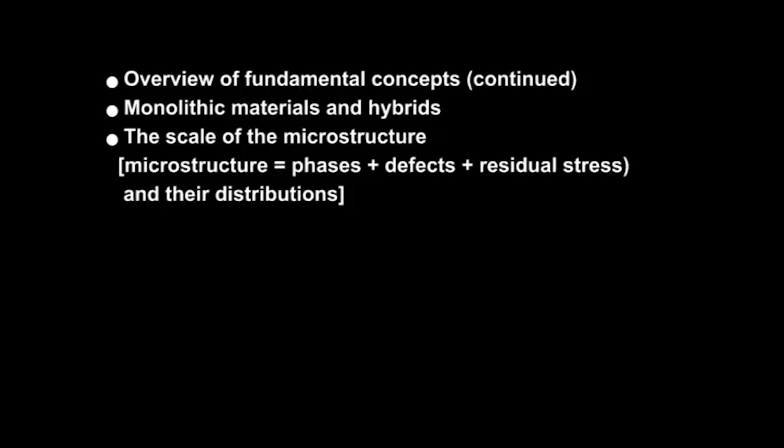Before proceeding further, let us briefly review the concepts we have considered so far. We asked the question of what determines the properties of materials, and the answer we gave was it is a combination of the composition of the material, the phases present in the material, and their distribution.

We have to consider the defect structure, a formal definition of which we will consider soon, and last but not least, we have to consider the presence of residual stress in a material, which is present even in the absence of any external loading or constraints. This becomes especially important when we are talking about structure sensitive properties like yield stress and fracture toughness.

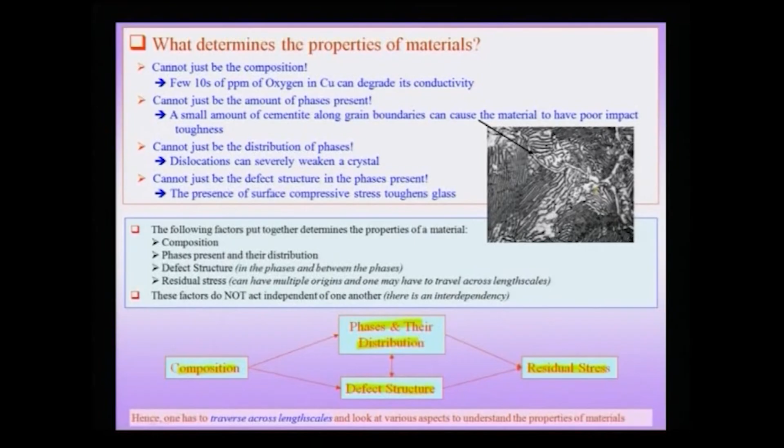As an example, we had considered the micrograph shown on the right hand side, wherein there is a steel with a cementite network all along the prior austenite grain boundaries.

We had also asked the question that if you are talking about phases and their distribution, what kind of phases exist, and we had classified phases based on the geometrical entity or the physical property.

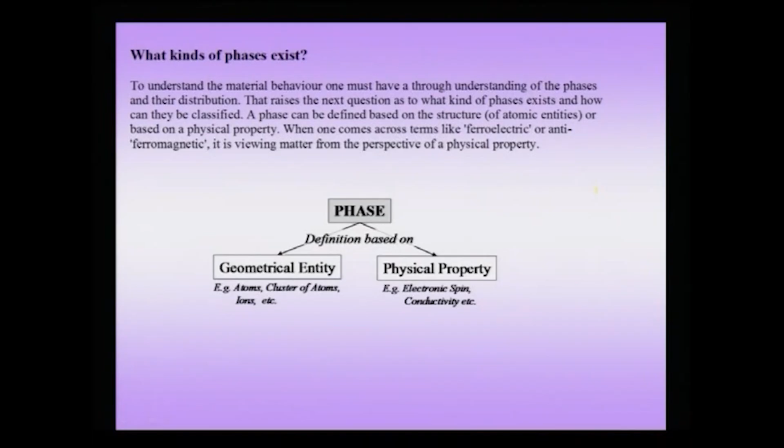We had also considered various ways of looking at the atomic form of matter, and we had come across important concepts like the atom based structure, which can be classified into crystals, quasi crystals, and amorphous phases. We also said that based on band structure we can have metals, semiconductors, and insulators.

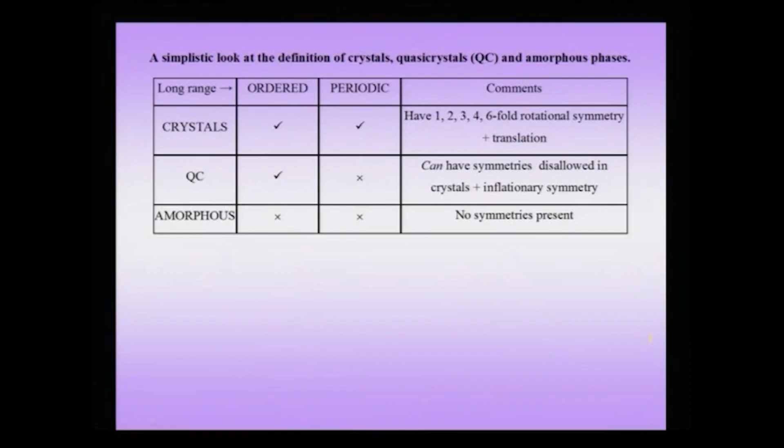From this course's perspective, we had talked about a size based classification which gives us nanocrystals, nano quasi crystals, nano liquid crystals, etc. We had also defined crystals in a very simplistic way: crystals are ordered and periodic, and amorphous phases, on the other extreme, are neither ordered nor periodic. Today let us consider classification of crystals based on the bonding characteristics.

Based on bonding, a substance could belong to a certain type like an ionic crystal, but based on the atomic order the same thing could be glassy, in other words amorphous. Like before, one way of classification will not clash with another way of classification. The bonding characteristics of the material play a very important role in all the properties we think of.

So, based on bonding, we can classify crystals into two types: molecular crystals and non-molecular crystals. In molecular crystals there are covalently bonded molecules, like for example in fullerene we have the C60 molecule, and in water we have the H2O molecule.

Other examples of molecular crystals are crystals based on the carbon dioxide molecule, sucrose molecule, etc. The bonding within the molecule is typically of the covalent type, but the intermolecular bonding which actually gives rise to the crystal is usually of a weak type; it is a non-covalent interaction.

Typically these could be of hydrogen bonding type or dipole-dipole bonding, a detailed list of which we will soon consider.

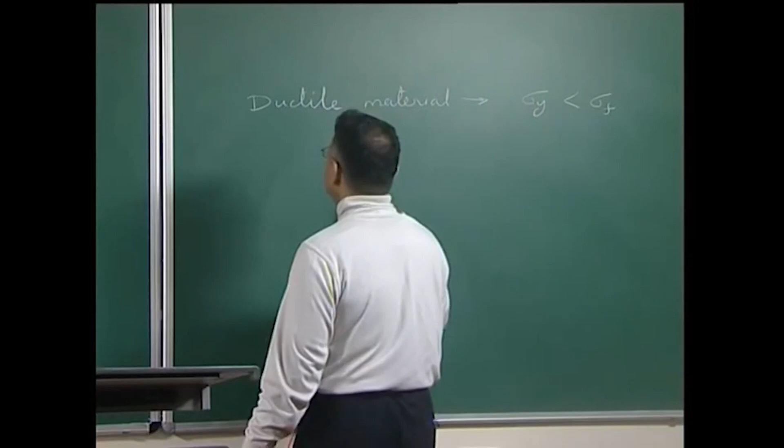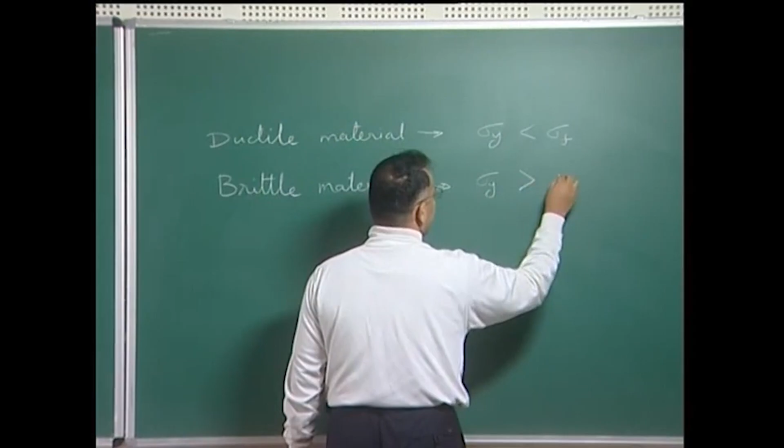So, if I am considering a ductile material, a brittle material on the other hand is one whose yield stress is larger than the fracture stress. A ductile material will yield first before fracturing. In other words, the yielding here is specially by a mechanism known as slip, and fracture is caused by propagation of cracks.

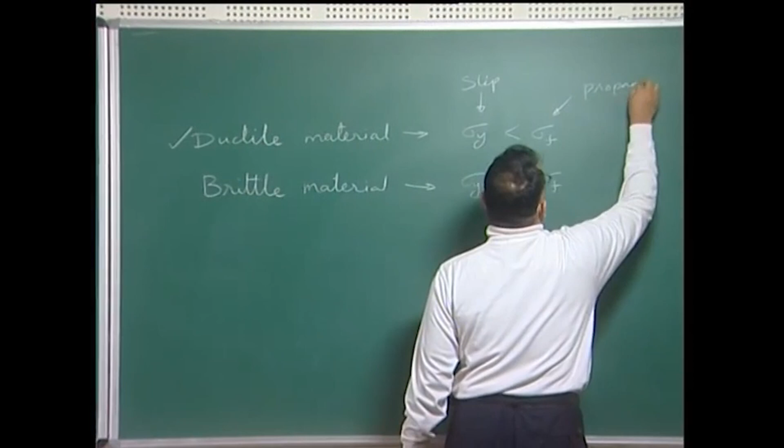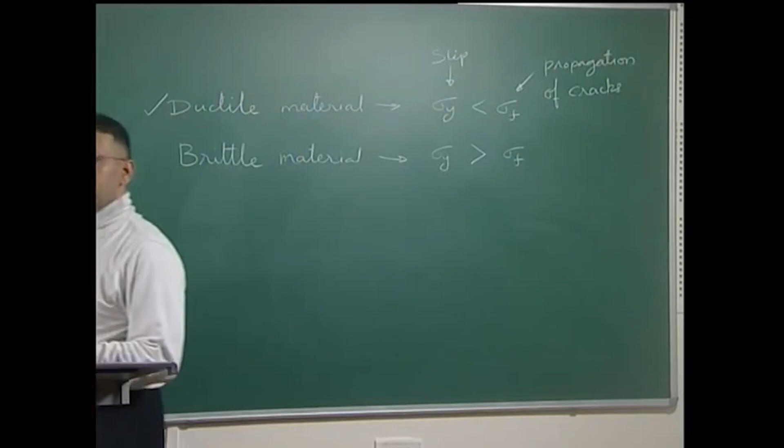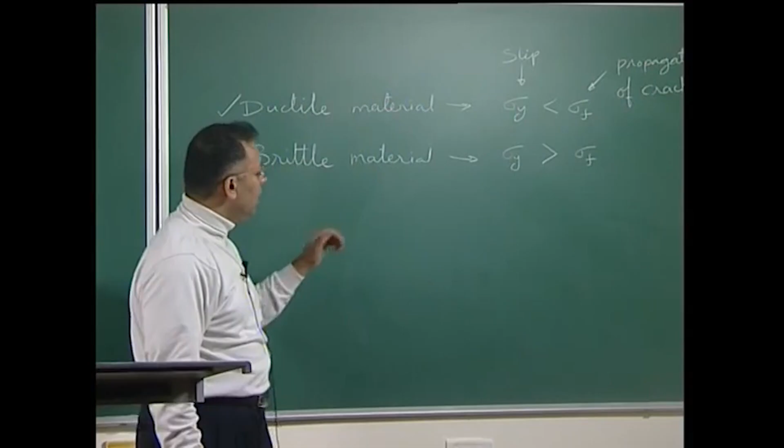So, when I have two competing mechanisms which can take up my external loading, one being slip and the other being propagation of cracks, if my yield stress is smaller than my fracture stress, then the material is called ductile. Yield stress is a macroscopic manifestation of the inherent lattice friction, which is otherwise called the Peierls stress or the Peierls-Nabarro stress.

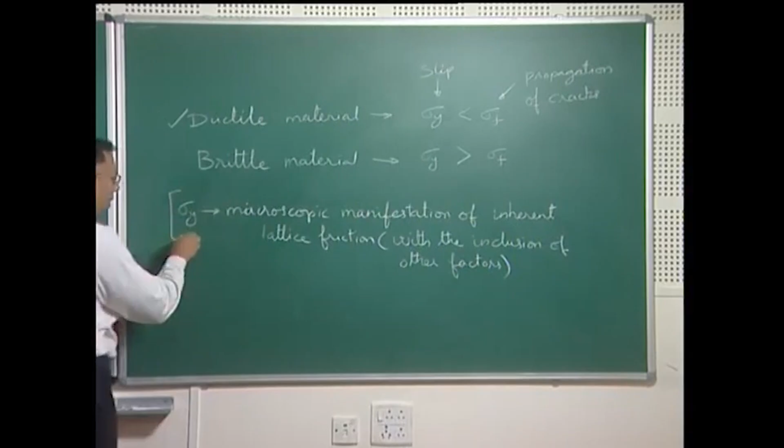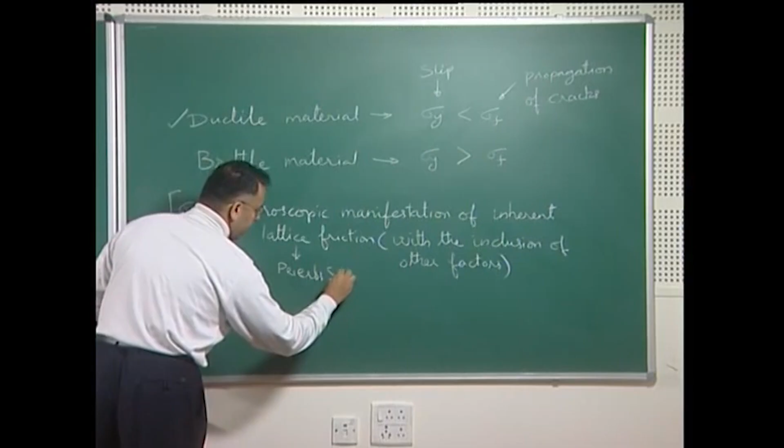Other factors would come into picture when I am taking my inherent lattice friction, which I call the Peierls stress, and go to a macroscopic gross property like yield stress. So, this Peierls stress is a strong function of the bonding characteristics of the material.

A covalent material typically has a high Peierls stress and therefore has a high yield strength, so if I am trying to plastically deform a covalent material like diamond, it turns out to be difficult. An ionic material, which again has a high Peierls stress, would fail by brittle fracture rather than plastically deforming. Therefore, if I am looking at any property, the bonding characteristics become very important in determining the properties.

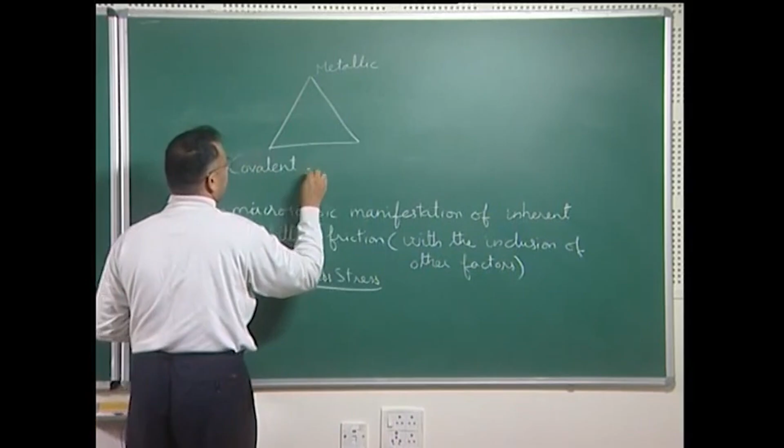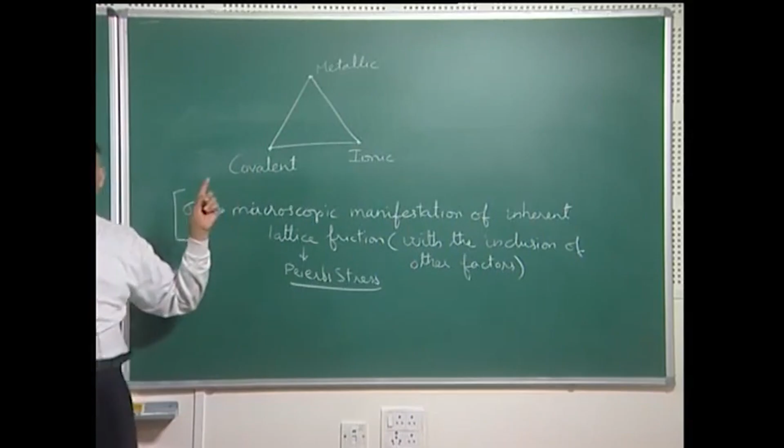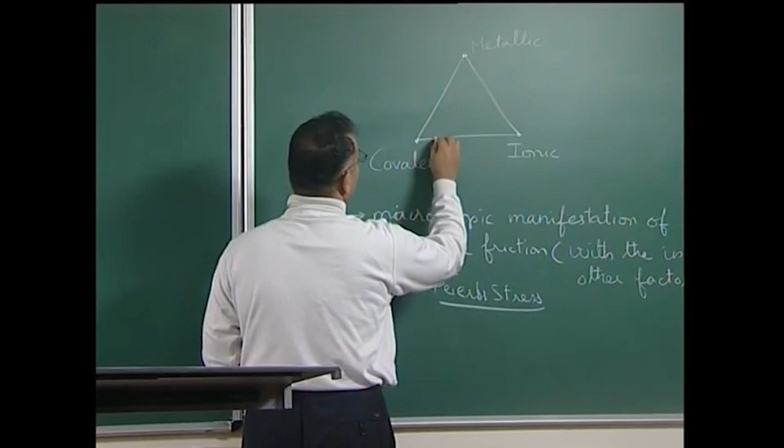These three extremes, metallic, covalent and ionic, represent three extreme bonding characteristics, and a given material could actually fall somewhere between them on this triangle. It could have some covalent characteristics but a little bit of ionic characteristic, and so in this triangle it could lie here. Certain metallic crystals could also have a certain amount of covalent character, and therefore would not be on the extremes but would lie somewhere in this ternary looking plot.

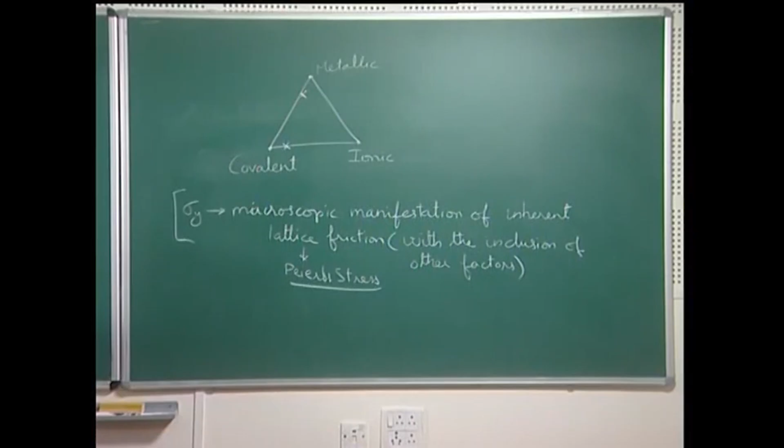Therefore, real crystals have characteristics which have a bonding that is a combination of covalent, ionic and metallic characteristics. We will consider in the next slide that there are other weak interactions which can mediate the formation of crystal in molecular crystal apart from the hydrogen bonding, which is responsible for the formation of the ice crystal.

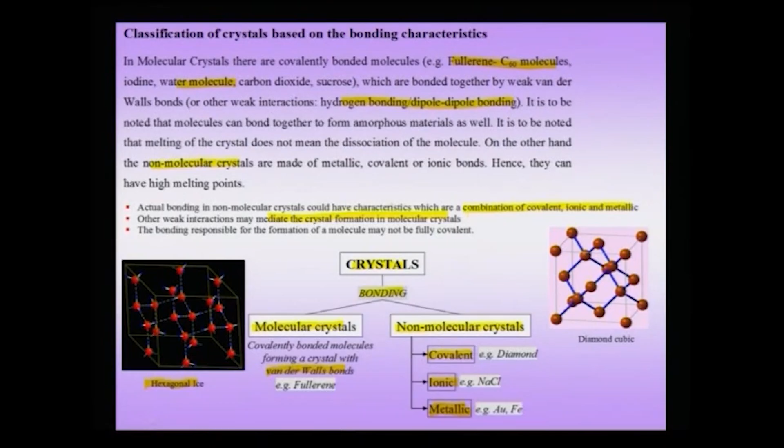The kind of bonding we are considering here forms an important basis for the properties that the crystal exhibits. Therefore, it is important to note if the crystal is a molecular crystal or a non-molecular crystal, and given it is a non-molecular crystal, which will form much of the considerations in this course, we have to consider if it is a covalent crystal, an ionic crystal, or a metallic crystal.

We will briefly consider here various kinds of interactions in molecular crystals, the weak interactions, though we will not go into detail. An interested reader may want to refer to details for various individual molecules or crystals as to which bonding is responsible for the formation of the molecular crystal. Typically, in this molecular crystal, it is covalent interactions which give rise to the molecule, and these are typically given symbols like sigma, pi, delta.

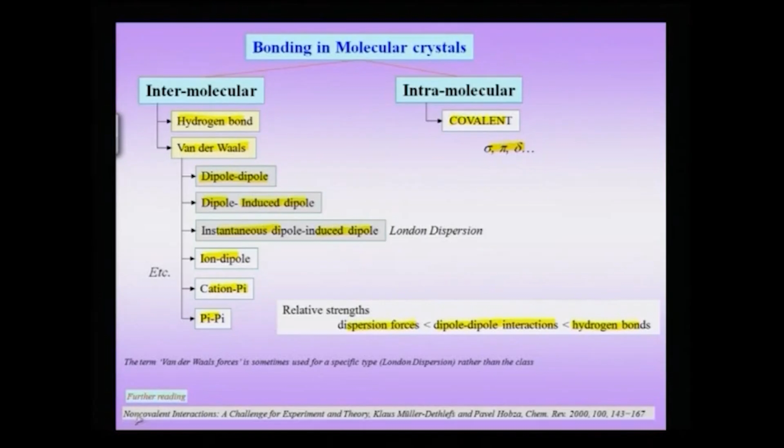The book on non-covalent interactions is an exhaustive study of these interactions, and an interesting paper in Chemical Reviews would be a good reading place for students to learn further about these non-covalent interactions.

Now, we have to ask ourselves, we have talked about phases, but there is a larger picture beyond the phases when a material is given to you. For instance, I am holding a pen here. You can see that this pen is not made of a single kind of material. There is plastic, there are some metallic parts, and other parts which are hidden away inside.

So such a material, or for instance your cell phone, your typical cell phone, is what might be called, of course, an entire device. A device has many components, and some of these components may actually be what is called a hybrid. It is not a single material which goes on to make your entire cell phone or some of its components.

Now, why is this consideration important, or why is the question of what kind of bulk materials exist an important question? It is because later on we will see, when we talk about nanomaterials, that not all components of the nanomaterial may be nano in size. Only a few of these components, and some of these may be even property related, may actually be nano sized, and the remaining components may actually be bulk like, and those bulk like components will continue to have the properties which you normally expect for bulk materials.

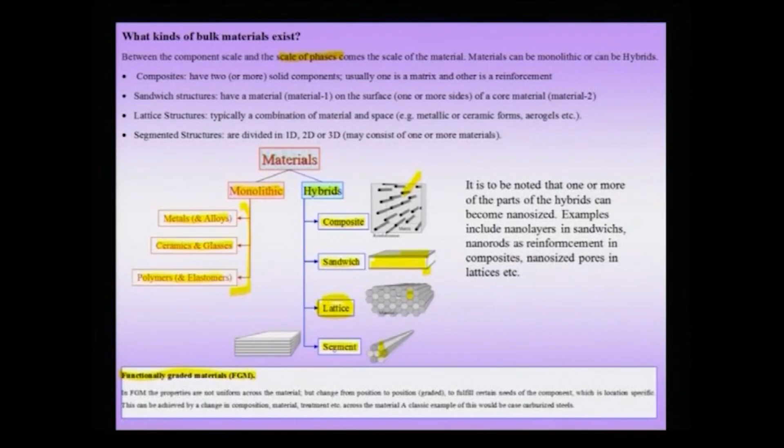Further to this kind of classification, we have another important class of materials we need to look into, called functionally graded materials. In functionally graded materials, the concept is that...

For instance, in a component, this could be the inside where the fluid flows, and this could be the outside of the component, which could be exposed to erosion or corrosion.

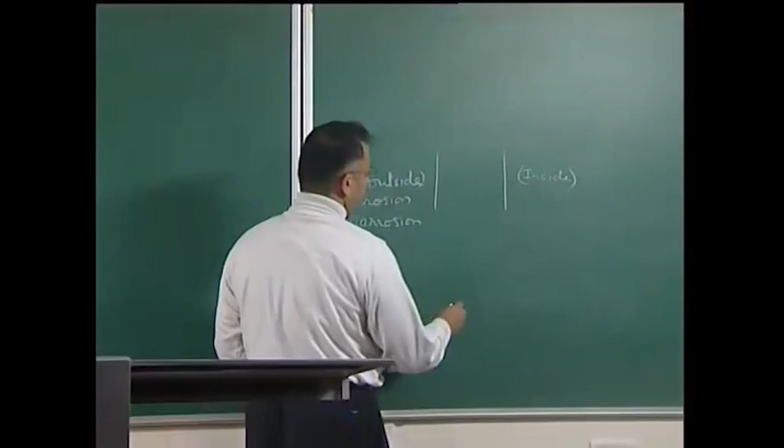Even though I have a single material here, I want to make it graded, and I can make it graded in terms of the composition, or in terms of the precipitate density, etc., so that there is a gradation in the properties.

For instance, this surface could be harder and this surface could be softer, and I am plotting hardness with respect to the surface. So this is my outer and this is my inner, and the hardness could be varying, though it need not be a linear variation.

Nevertheless, such a functionally graded material can perform a very important role: in a single component I do not have 2 or more distinguishable components which I can call A and B, but there is a continuous gradation of properties. This gradation could come from a variation in composition, or if I am talking about a composite, a reinforcement density which is higher here.

For instance, here I could have more particulate reinforcement, while on this surface the density could be a little smaller. Or I could think of the composition here being rich in phase A and poorer in phase A as I go out from here, so this side could be almost pure B and this could be almost pure A.

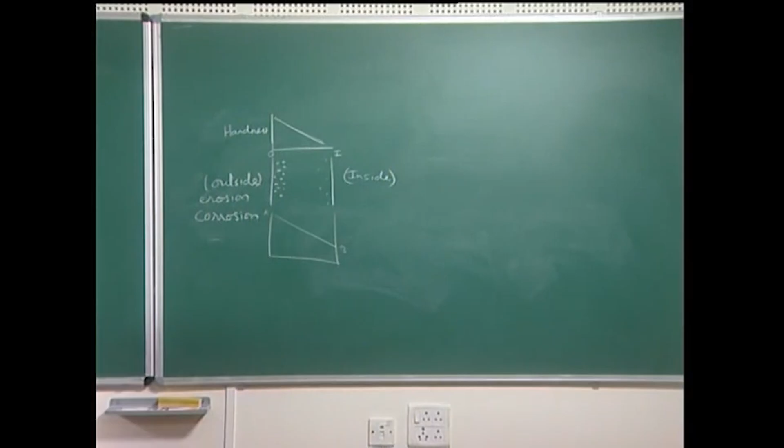So there are various ways of making functionally graded materials, and the purpose is to build in a single material a change in properties as you go from one spatial region to another, which could be a continuously varying property. A classic example of this is case carburized steel.

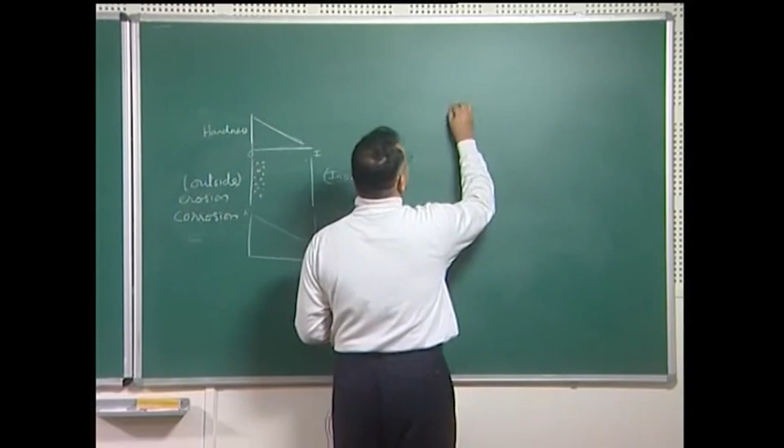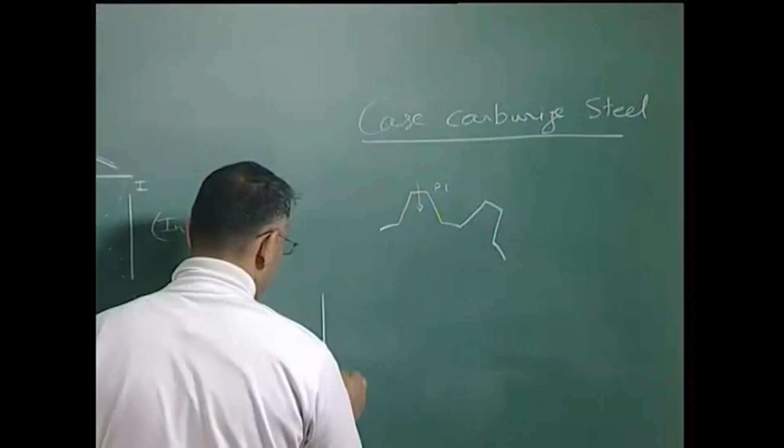In case carburized steel, suppose I am talking about a gear wheel, and say this is my gear wheel tooth. I can think of a decreasing carbon composition from the outside to the inside. Suppose this plane is P1, going inward - as I go from P1, the carbon concentration drops off. So this is the concentration of carbon.

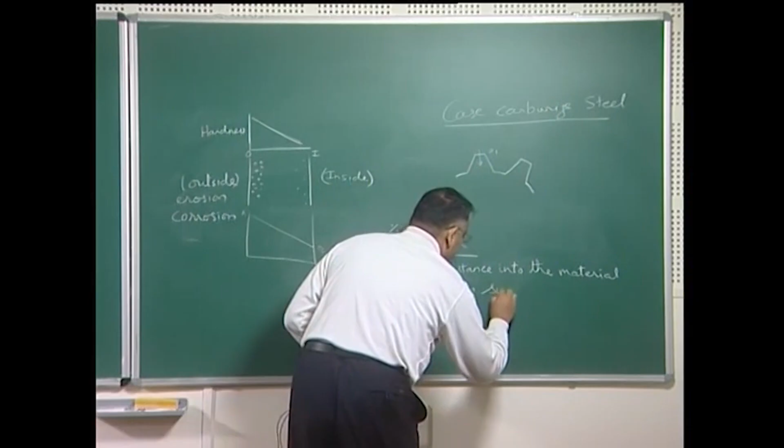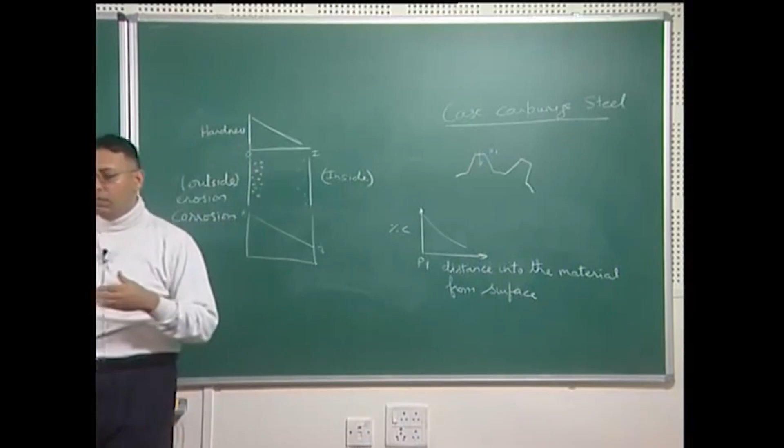Now, the important point is that I take a material with a certain amount of carbon in it. For instance, I would take 0.2% carbon steel, then impose a carbonaceous atmosphere on the surface, which allows carbon to slowly diffuse into the material. After some time I stop the carburization process, cool the material, and later take the material to high temperature and quench it.

In this process, the surface would have a high carbon martensite, while the interior would have a microstructure which is more like a pearlite. So I have an outer microstructure that is martensitic, and an interior microstructure that is more like pearlite.

The reason for this variation in microstructure is related to the cooling rate. The surface feels a very high cooling rate or quenching rate, which implies that the high carbon in the interstitial solid solution forms martensite, while the interior faces a low cooling rate which gives rise to pearlite.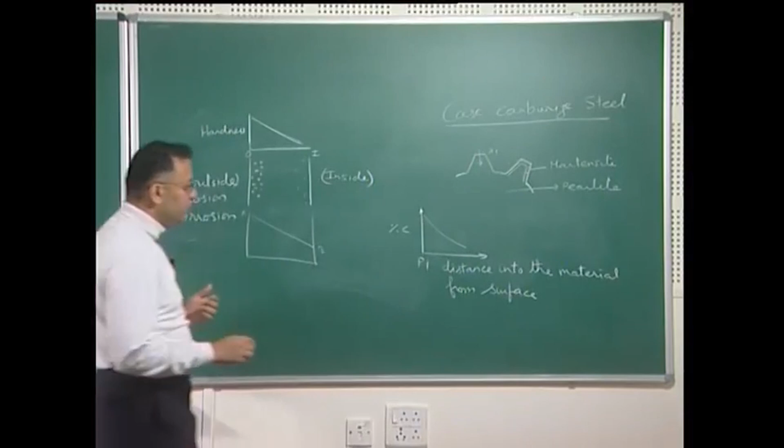This pearlite on the interior side also has a lower amount of carbon, similar to the original carbon which was in the material, something like 0.2% carbon. Therefore, I will have a material in which the surface is extremely hard and the interior is tough.

This structure can be thought of as a classic example of a functionally graded material, having a gradation in properties as you go from the surface to the interior. As you know, the gear wheel meshes with the remaining gears in the system, and therefore it needs to be hard. The interior of the wheel needs to be tough because the material has to be resistant against fracture.

Suppose the material was like we know martensite is very hard, but very brittle. We do not want a material which is throughout martensite, because such a material would be very brittle and would have very poor impact toughness, in other words very poor tolerance to the presence of cracks in it, which are unavoidable during the fabrication of a component.

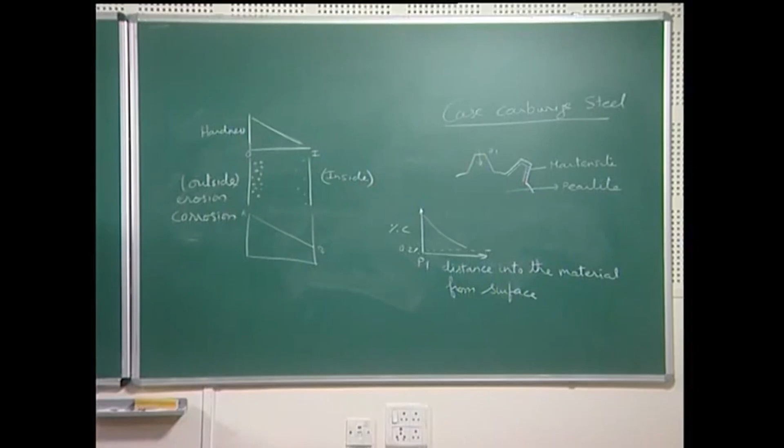The cracks here are typically micro cracks, not large size cracks. In this example, you can clearly see that I have under my control the variable of composition, a gradation in composition, and the formation of the kind of phases - the phase on the surface is martensite, the phase on the interior is more like pearlite, which is actually not a phase but a micro constituent.

So, I can have a gradation in the formation of the phases and micro constituents, and therefore I have a handle on the properties.

We shall soon see how this concept of controlling composition, going from composition to phases to microconstituents, can be thought of in a functional definition of what we call a microstructure - an all encompassing definition which can give us a handle on what we had defined before as the microstructure sensitive properties.

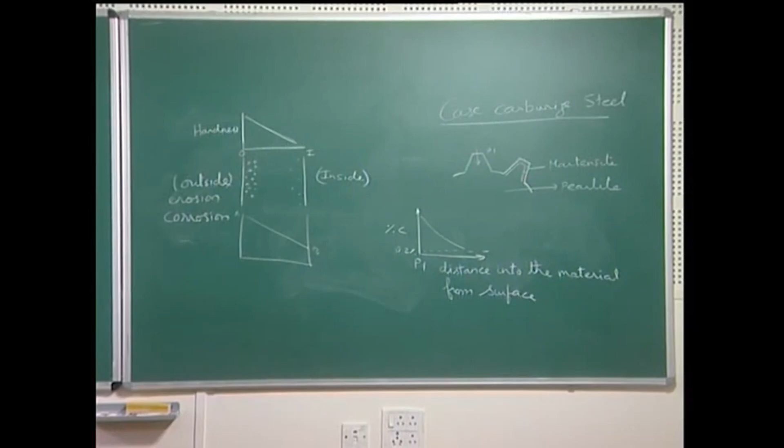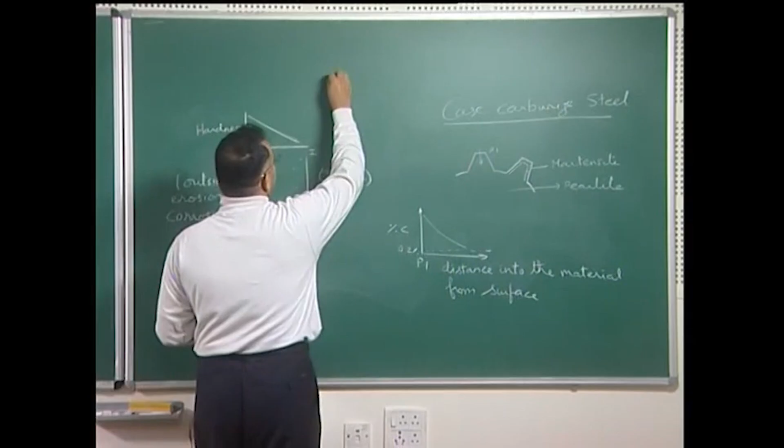Another simple way of creating gradation based on precipitation, which is what we considered here, is to have what you might call a precipitation hardened system.

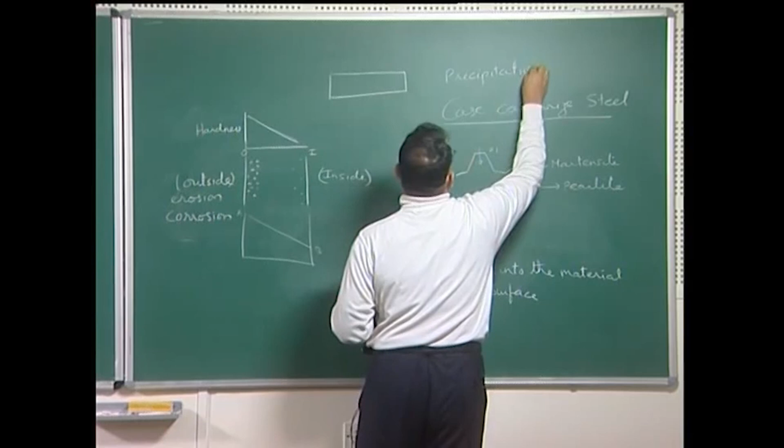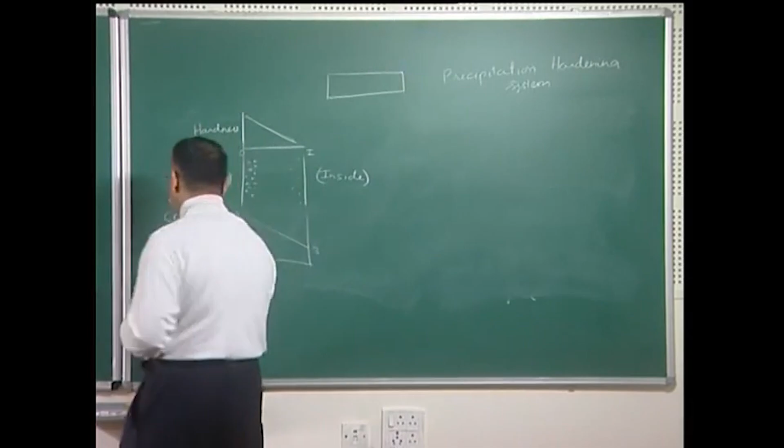In a precipitation hardening system, essentially what we do is - the classic example is an aluminum 4% copper alloy system - we take the system to a high temperature where you have a uniform solid solution. We quench the system to room temperature, typically from a temperature like 550 degrees Celsius, which according to the phase diagram gives you a uniform solid solution of copper and aluminum.

When we quench it, at room temperature we actually have a super saturated solid solution of copper and aluminum. Additionally, the system will also be super saturated with respect to vacancies.

Now, I can age this system at a temperature like 180 degrees or lower, but not as high as close to the equilibrium Solvus line, and in aging I will produce a fine distribution of precipitates. Later on we will see an example of how this fine distribution of precipitate helps increase the strength of a material.

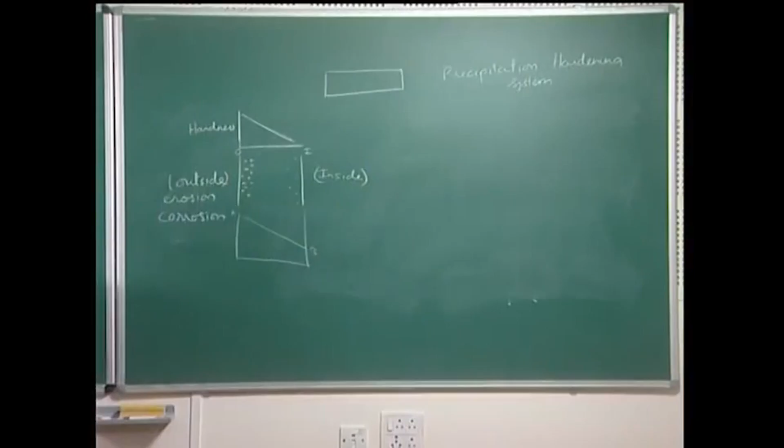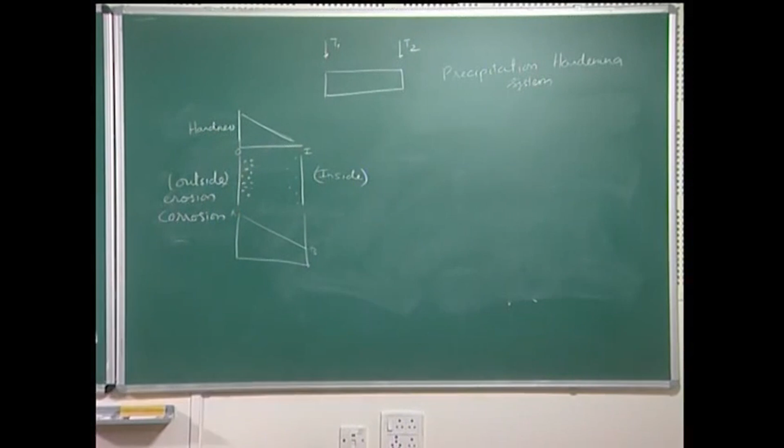On the other hand, the lower aging temperature might produce fine GP zones or theta double prime precipitate.

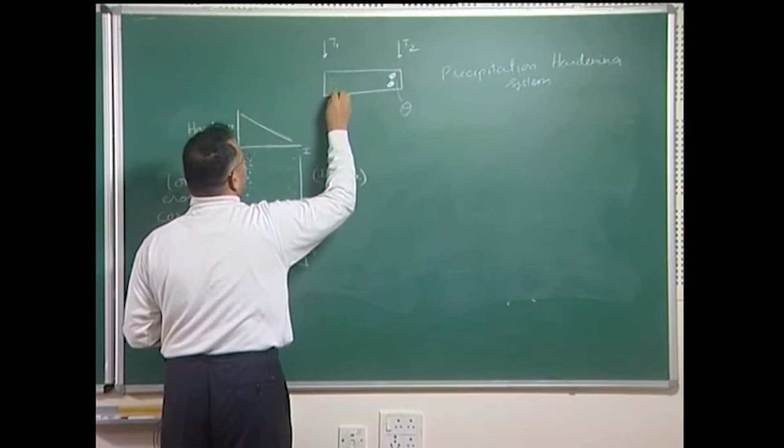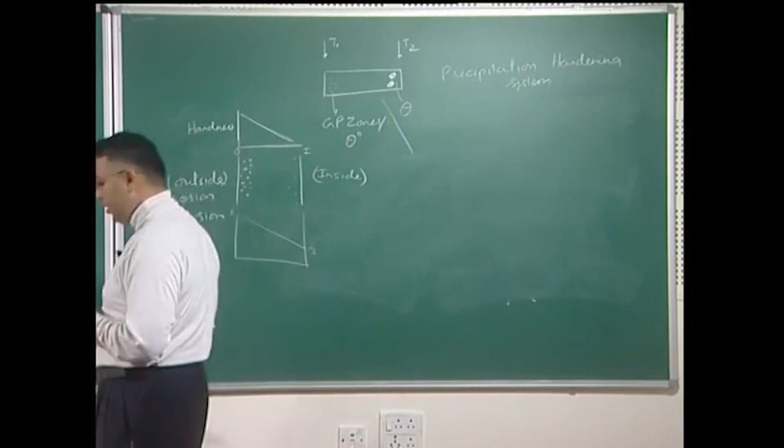So, I can now engineer a gradation in the kind of precipitate or phases produced during heat treatment, and in this process I can have a gradation in the properties. Therefore, I can have monolithic materials with a variation in composition from one side to another. We can have hybrids, and these can later be made into a more sophisticated version called functionally graded materials, which help in the actual engineering component by giving a site-specific property for better performance.

Now, when we considered nanoscale materials, an important concept was that there are entities in the system which are nanoscale, but the more important thing to note is that whenever we have a system, we cannot understand its properties without actually traversing across length scales. What length scales we need to consider is what this diagram shows, and it also tells you a bottom-up approach towards assembling a component.

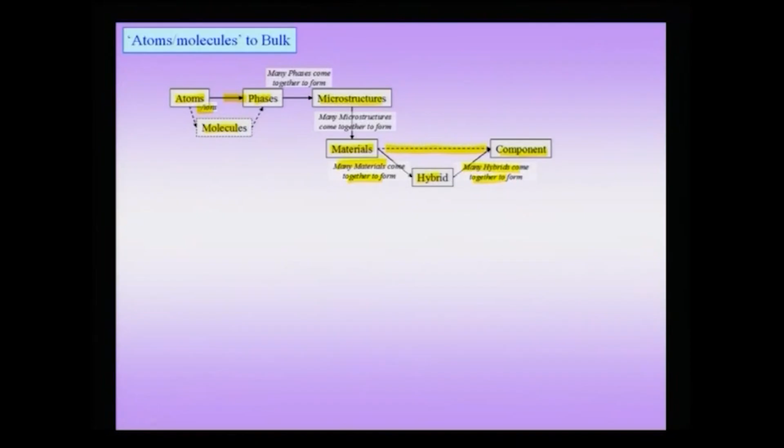For instance, suppose I start with atoms which are heavier, obviously the component is going to be heavier. Suppose I start with magnesium, a lighter metal, then my component is going to be lighter. But the story does not end there. Suppose I am interested in a property like wear resistance. If I can make a hybrid in which I coat my magnesium with a harder phase, or selectively impregnate a harder phase on the surface, then I can get a harder component. Therefore, I need to worry about all the length scales between the atom and the component.

The design of the component itself is very important as far as the performance goes. For example, if a component has sharp bends, those sharp bends can give rise to stress concentration, which could be regions of failure. So I may want to design the component with a high radius of curvature wherever possible.

Now we are in a position to actually define the term microstructure in a functional way. Having covered sufficient background to understand the term, we will define it based on two important considerations: it is going to be a functional definition, and it is going to include multiple length scales. First, I will give a justification for why you need to define microstructure this way.

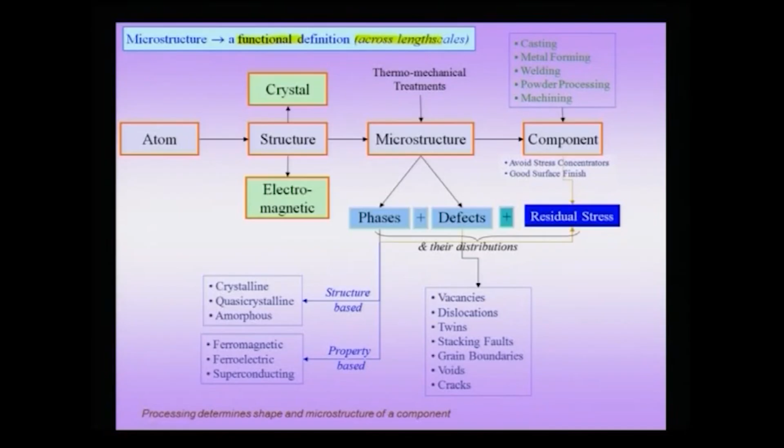Now suppose I am looking under a transmission electron microscope, then I could be having a magnification going up to 1000 kx or 50 kx, and in this case I may have to define a new term as nanostructure, or some additional term for length scales even smaller than that. Therefore, I will have to introduce multiple new terminologies whenever I am changing the scale of my viewing.

This scale of the definition of microstructure as viewed under high magnification, typically 1000x, is the usual, generally accepted terminology. The way we are going to define microstructure could have been given a new name, but since the most important thing we are interested in is what is called the microstructure-property correlation, we do not want to introduce new terms. Instead we use the term microstructure, but built into it these two aspects: the functional aspect and the aspect which covers all length scales.

And as we shall see, by this very definition of microstructure as defined here, we will be including all length scales of the problem.

We have already seen that at one end of the spectrum sits the building block of the atom, and at the other end of the spectrum is the component. The component is typically formed by various kinds of manufacturing processes like casting, metal forming, welding, powder processing, machining, etc.

These are typical examples for metals, but there are other processes used for ceramics, and still more used for polymers. In the component forming methodology, you could have a material synthesis aspect followed by an aspect which actually shapes it into the form of a component. So there are multiple steps which could be involved in forming a component.

The next scale after the atom is the scale of the crystal structure, or simply the structure, as you might call it, and we have already seen how atomic structure can be classified.

Now, when talking about structure, we could be talking about the atomic order based structure, or what you might call the crystal structure, or more importantly the electromagnetic structure of the material. In other words, I could be talking about electron densities, or the orientation of spins or the magnetization vectors of individual atoms, ions, etc.

The next scale after this structure, where the crystal structure and the electromagnetic structure reside, is the scale of the microstructure.

The important thing is that this microstructure can form through those processes which are also used to form the component. In other words, the key features of those processes which give rise to the microstructure, or the component, are the thermomechanical treatments. I could be talking about heating the material, or forming the material, using extrusion, rolling, or a combination of both. I could use a high temperature thermomechanical process, where I could actually do the rolling at a higher temperature. Therefore, the basis for formation of the microstructure is very similar to the basis of formation of the component.

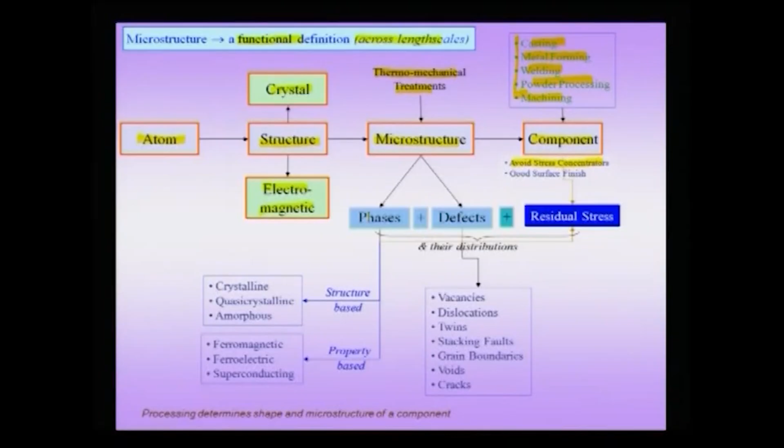We can think of a microstructure as phases and their distributions, defects—and we will soon introduce a term called defect structure—so defects and their distribution, and last but not least, residual stress and their distributions. So we have three important components to a microstructure: the phases, the defects and the residual stress. Not only do we have to consider these three components, but we have to consider their distributions. So we need to understand the terms used in this definition, and also what we mean by the term distributions.

You have to note that residual stress can be an integral part of the microstructure itself, or can be coming from a larger scale, like when we form the component. So there could be multiple origins of residual stress, but more importantly, once residual stress is present in a material, it might actually play a profound role in the properties of the material.

Now, we have already seen what kind of phases can exist. For instance, we had already seen a structure-based definition of phases, like the crystalline, amorphous, etc. We had also talked about a property-based definition of phases, like ferroelectric, ferromagnetic, etc. So we have a clear understanding of what the term phases means, but we need to be introduced to the concept of a defect, and more importantly the concept of a defect structure.

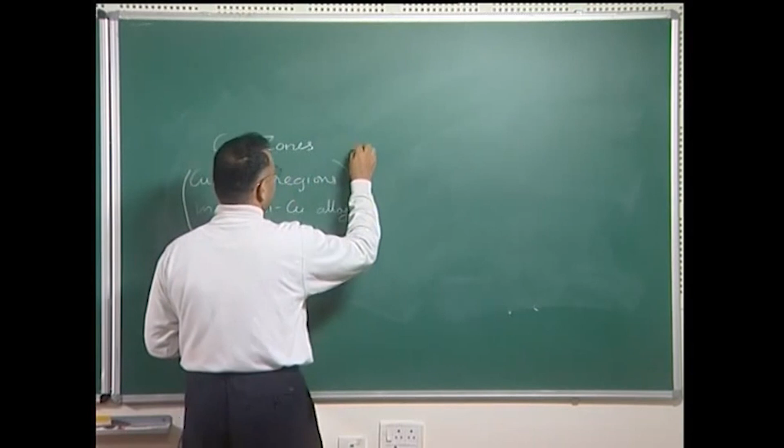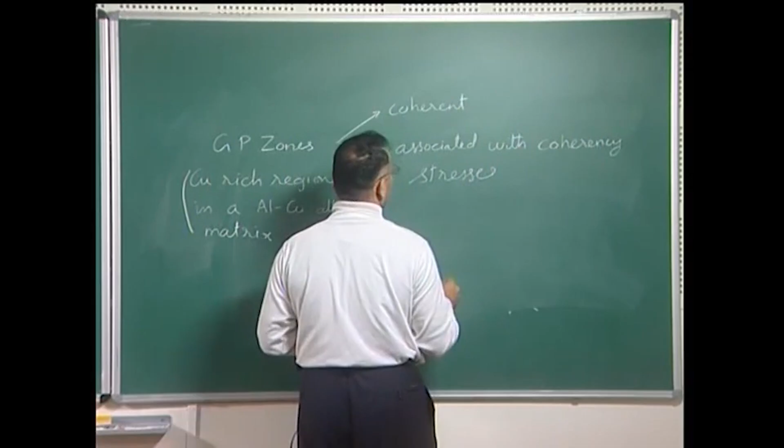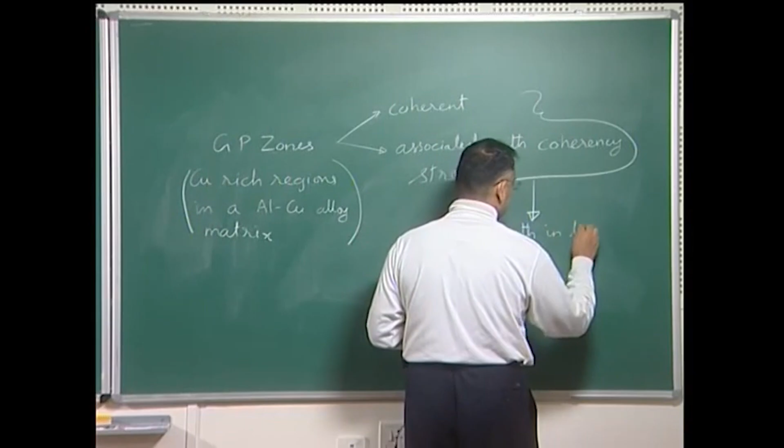And these GP zones are basically characterized by both the residual stress associated with the GP zone and the copper rich regions, the physical dimensions of that. Both of these are in the nanoscale, and the presence of both of these is going to affect the properties of the material, the aluminum copper alloy which has these GP zones.

I had mentioned that I have to worry about the phases present in the material, but along with it, the distribution of the phases. We have already seen one clear example: the presence of cementite in steel along the prior austenite grain boundaries, showing how distribution can drastically alter my properties.

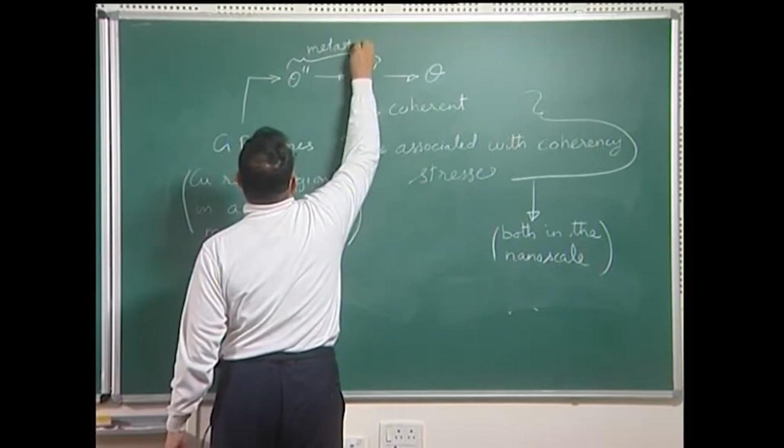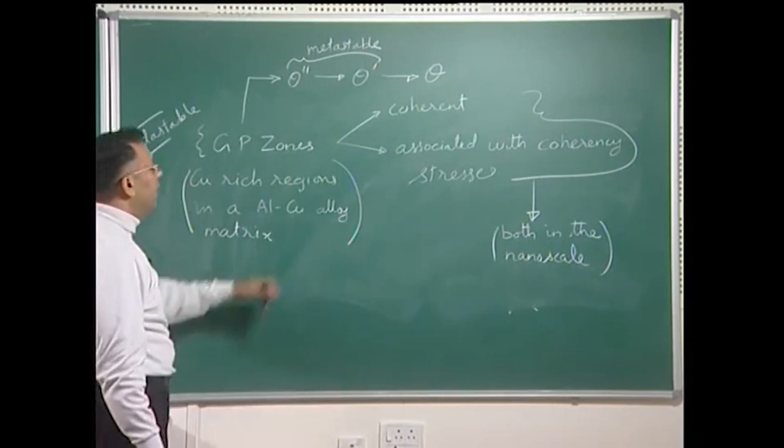For instance, in the example of GP zones, if this component with GP zones is employed in service at high temperatures, these GP zones will slowly transform into theta double prime precipitates, which will later transform into theta prime precipitates. Then finally you will get the equilibrium theta precipitates. These two are metastable phases, and GP zones are metastable as well. They will transform finally to the equilibrium phase theta, but it would not stop there - there will be coarsening of theta.

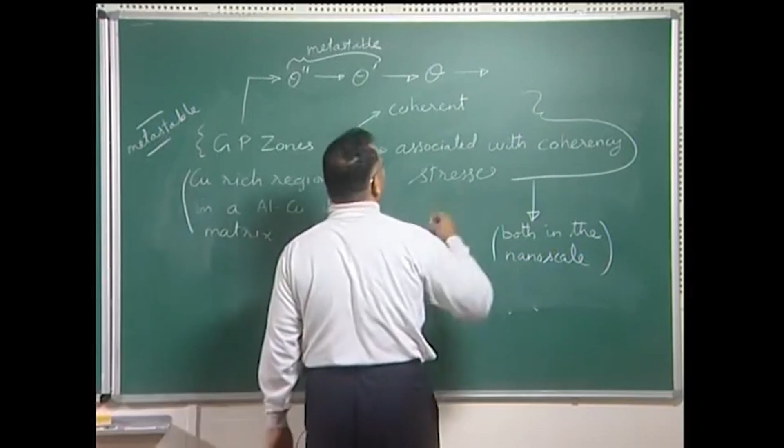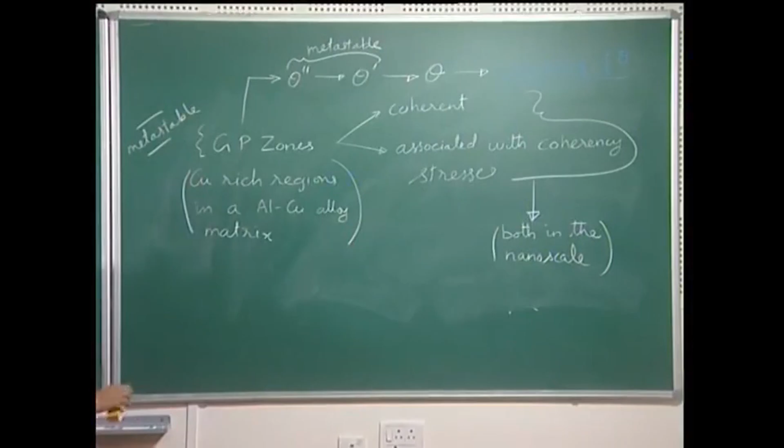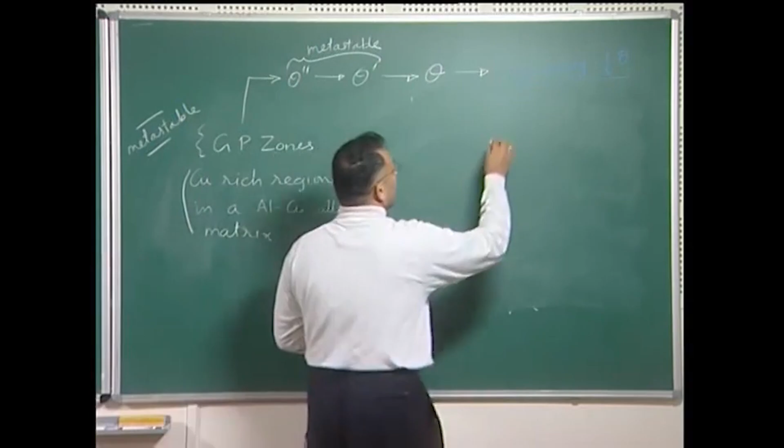In coarsening of theta, what will happen is that larger sized precipitates of theta would actually grow at the expense of small size theta, and in the end the average particle size would increase, but the interparticle or interprecipitate distance would increase. And we are talking about the average precipitate size.

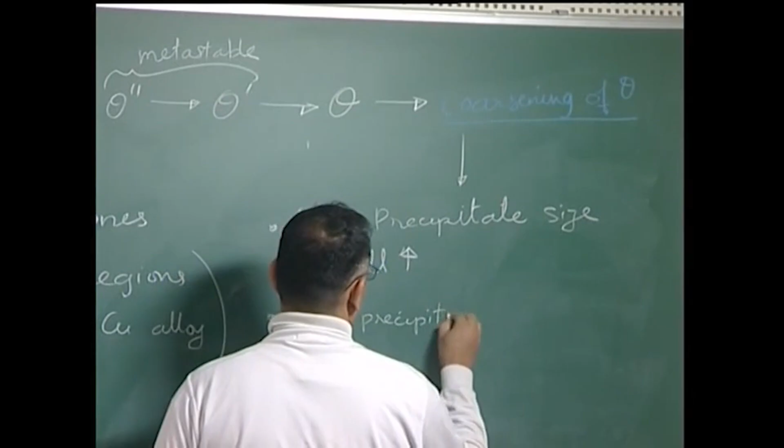During the coarsening process, two things would happen: the average precipitate size will increase and the interprecipitate distance would increase. In a later numerical example we will see that this is actually going to be deleterious for the hardness or strength of the material.

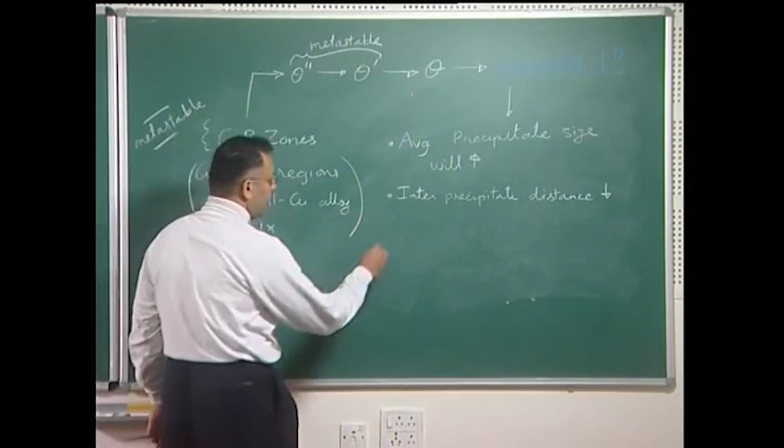As we have seen, when you are doing the precipitation process, some nucleation events occur earlier and some occur later. Therefore, at any point of time, if I freeze my microstructure and have a look, you would have a distribution of sizes.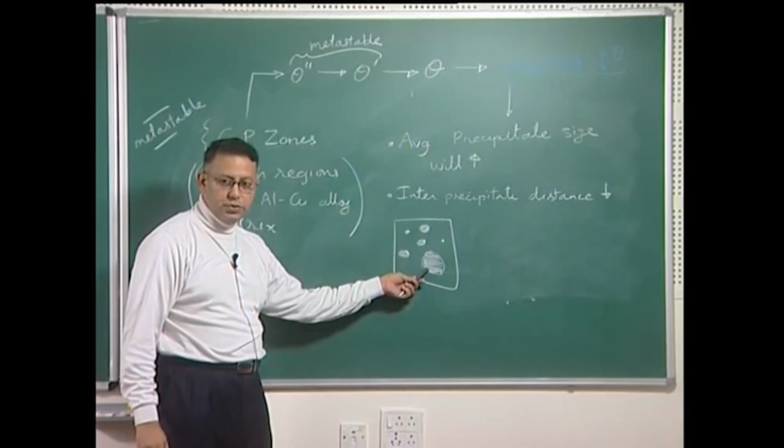If you look at the distribution of sizes, there could be extremely small precipitate particles, which are in the nanoscale, to precipitates which are in the micron scale. Therefore, there could be a range of sizes.

So when I am talking about distribution of phases, I am talking about the spatial distribution of sizes and the frequency of occurrence of various sizes.

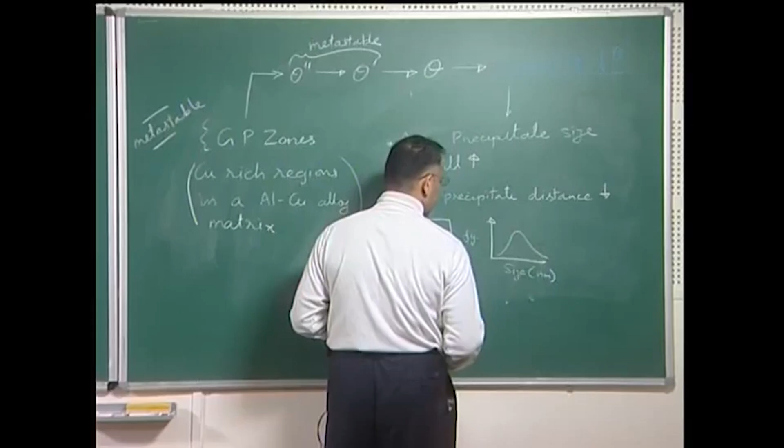Therefore, you can actually plot at some point of time the size, which could be measured in nanometers for instance, against the frequency, and you can see that there could be a variation which could also be thought of as a distribution of sizes. So I need to worry about the spatial distribution of these second phases.

I need to worry about the connectivity of the second phase, I need to worry about the frequency of occurrence of various sizes, and I also need to worry about what is the shape of these second phase particles.

If I am talking about a temporal evolution of the system, the shape of these particles may also change. For instance, suppose I am talking about in some systems the precipitation of gamma prime particles. This gamma prime initially precipitates spherically, but later on when the precipitate becomes semi-coherent or incoherent, it assumes a certain shape which could be cuboidal or a cube.

Therefore, this spherical precipitate with time changes into a cuboidal shape, and this is coming out because of the temporal evolution of the precipitate, and this is intimately related to the characteristics of the interface which changes from coherent to incoherent.

Therefore, when I am using the term distribution of phases, there are multiple parameters which I need to keep in view, and all these is towards understanding the properties of the material.

Now, another example: this is the right hand example, of an intergranular glassy film in a silicon nitride sample. This happens to be a lutetium magnesium doped silicon nitride sample, and you are noting that there are these crystalline regions on the top and bottom, labeled grain 1 and grain 2, but there is an amorphous region along the grain boundary.

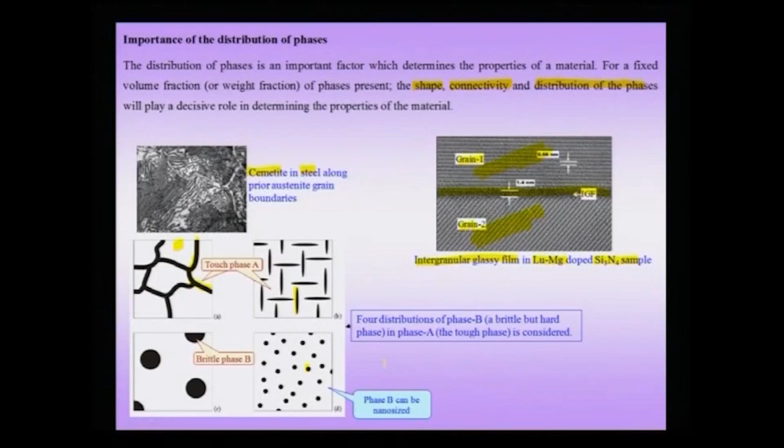This is very similar to the continuous network of the brittle cementite along the prior austenite grain boundaries.

Now, suppose the silicon nitride sample is loaded sometimes in impact, then it could so happen that the cracks may propagate along this glassy phase rather than actually propagating through the grain, and therefore this material may have a characteristic which is brittle as compared to if the crack was propagating in a transgranular mode.

Now, we had considered four schematic examples, and in some sense it was example A which was exemplified in the example of steel and in the case of the silicon nitride sample. In one case there was a crystalline phase like cementite along the prior austenite grain boundaries, and in the second case it was actually an amorphous film.

And if you look carefully at the scale bar here, this film actually happens to be in the nanoscale, while the silicon nitride grains are actually large grains and are not nanoscale. Only this intergranular glassy film is in the nanoscale, in the dimension which has been marked in the figure.

Therefore, I need to worry about the connectivity of phase B, its distribution, etc. If you look at figure B here, exactly the two phases are present which are present in figure A, phase A and phase B, and for now we will consider that the volume fraction of phase B is also constant, and the thing which has been altered is the shape and connectivity of phase B.

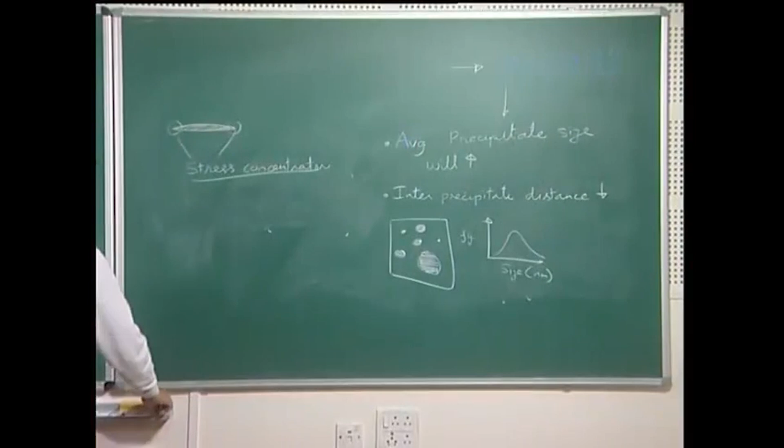So, I have a precipitate which is like this, and ahead of the precipitate this region acts like a stress concentrator. Cracks may propagate or initiate at these regions, which have been marked here by this circle. So, these cracks could nucleate here and propagate, leading to failure of the material.

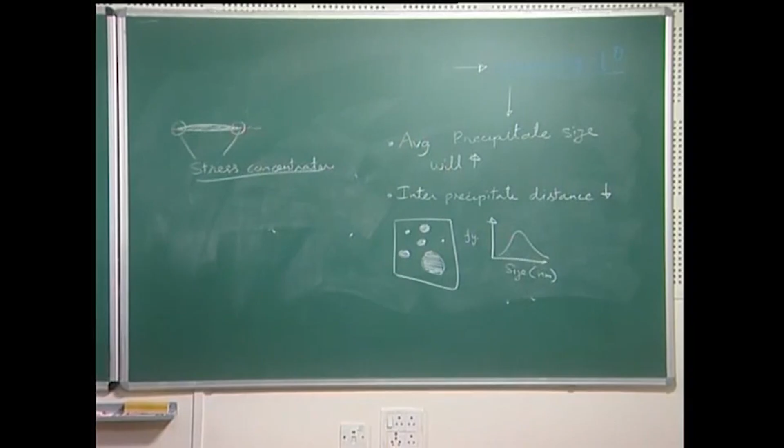On the other hand, suppose I consider the same distribution of B in A as in case C or case D. You notice that the same phase is now in the form of a sphere, depicted as a circle in 2 dimensions. In that case, the stress concentration effect is much reduced, and the propensity for crack nucleation at the second phase particle would be reduced.

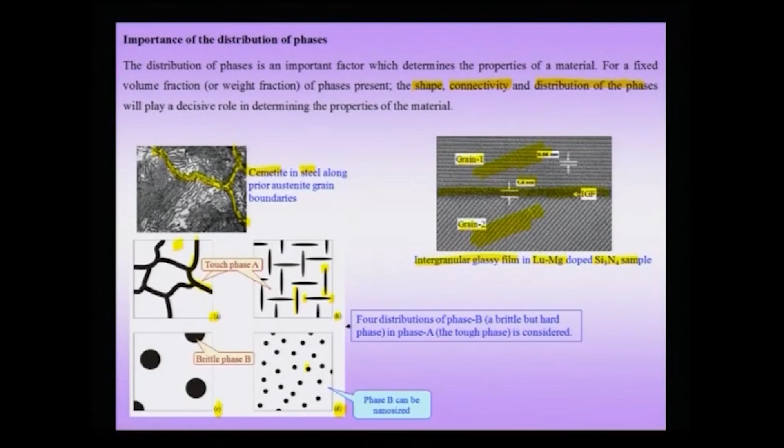But now I have two further distinguishable cases even for the spherical case, one being case D and one being case C. In case C and case D, the volume fraction of phase B is the same, which as I told you is a brittle phase, but the size of the precipitate in case C is larger.

What does this mean in terms of the properties? What is meant by size here? We have to compare it with a natural length scale in the material or in the component. For now, we restrict ourselves to the natural length scale in the material. One natural length scale could be the lattice parameter of phase B, or of phase A, and typically the lattice parameter, as we have seen before, could be much smaller than the length scale of the phase.

But there is another important length scale, which is the scale at which some of the defects in the material reside. Though we are not exposed to it yet, we will take a small peek ahead and see that a distribution like in case D would give rise to better hardening in the material compared to case C, and we will consider the origin of this hardening effect.

More importantly, from the point of view of this course, suppose I keep making the second phase or precipitate size smaller and smaller, then at some point it will become nanoscale, and therein lies a lot of interesting effects which we will observe as we go along.

Now, when considering these phases, one important thing we have ignored is the interface. The interface is important because we have talked about phase A and its characteristics, phase B and its characteristics, things like connectivity, shape, etc., and we are inherently assuming that we also know everything about the bonding characteristics of the material.

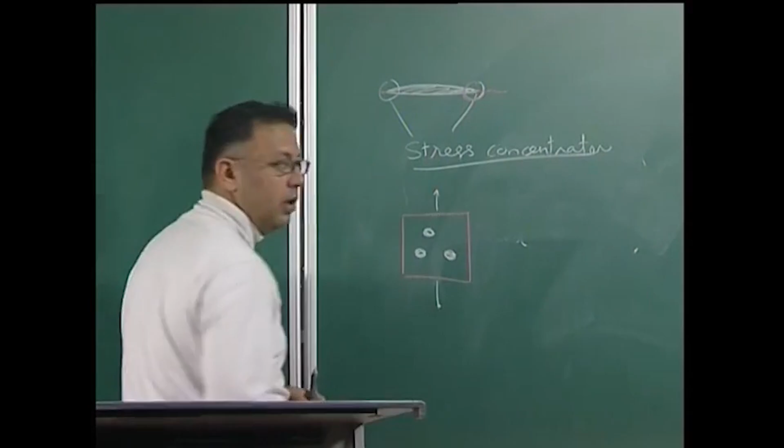Suppose I am loading such a material which has this distribution of phases. It could happen that no cracks form in material B, and no cracks form in phase A, but the interfacial bonding is so bad that, let me zoom this part out, an interfacial crack forms. In other words, there is interfacial debonding because of this loading. This debonded region has been shown in red.

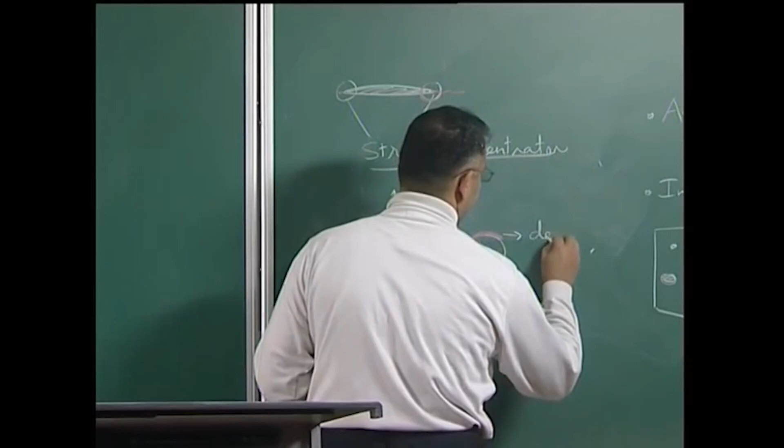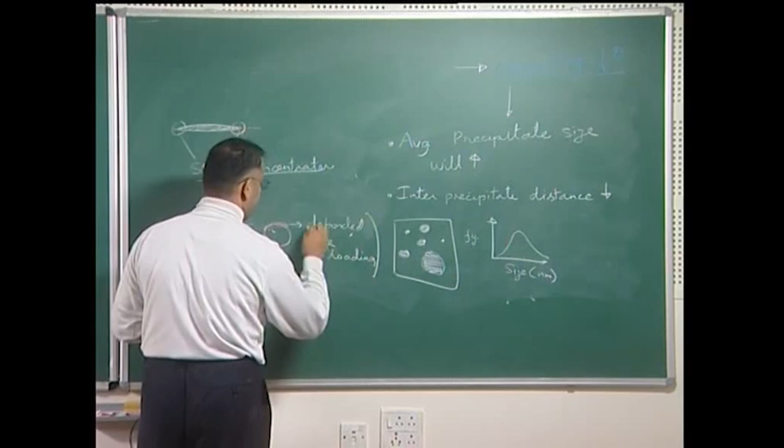Therefore, in spite of a microstructure which is very desirable, like for instance D, which I might use for some purpose, if the interface is not good, the properties may not be up to my expectations. So, I need to understand the distribution of phases and also the characteristics of the interface if I want the complete picture of how microstructure leads to properties.